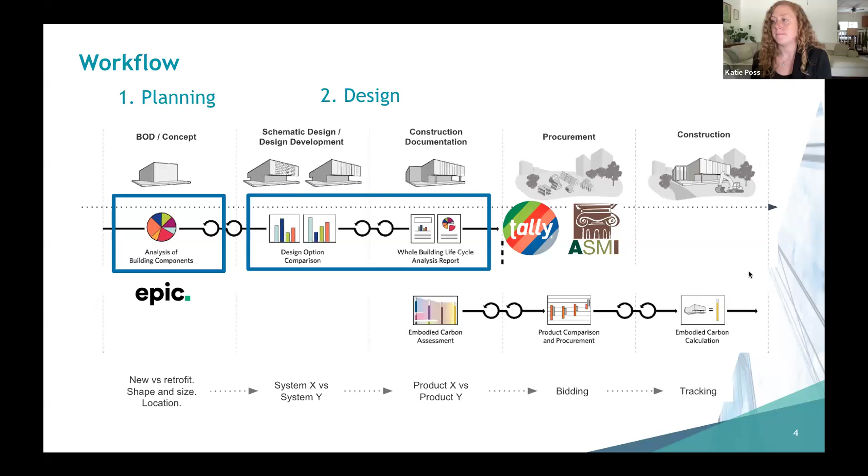And then when we advance through the drawings into procurement, at this point, the design is pretty much baked. We're not going to be able to make any significant changes to the design. But this is really where the construction partners, the GCs, the subcontractors, the material suppliers, they're starting to get awarded contracts and start to be onboarded to the project. They now have access to the drawings and the specifications.

And this is where EC3 can come into play, where you can look at the materials that are specified, look at materials that are locally available, especially in the case of ready-mix concrete and asphalt, understanding which material manufacturers have published EPDs in your area, and starting to look at some of the products that have been specified and determine which of them has a lower carbon footprint, and really using EC3 to inform procurement.

So as I mentioned, there is an entire ecosystem of tools, and there are more emerging every day. Tally, One Click, Athena, really those whole building LCA tools. There are tools that meet specific needs or pertinent to specific systems or materials. SE 2050's ECOM tool is really focused, as you could imagine, on structural design and structural elements. Bentley is really focused on infrastructure. Epic and CARE and Sustainable Minds, there is a whole slew of tools on the market, and they are used for different purposes and serve different functions.

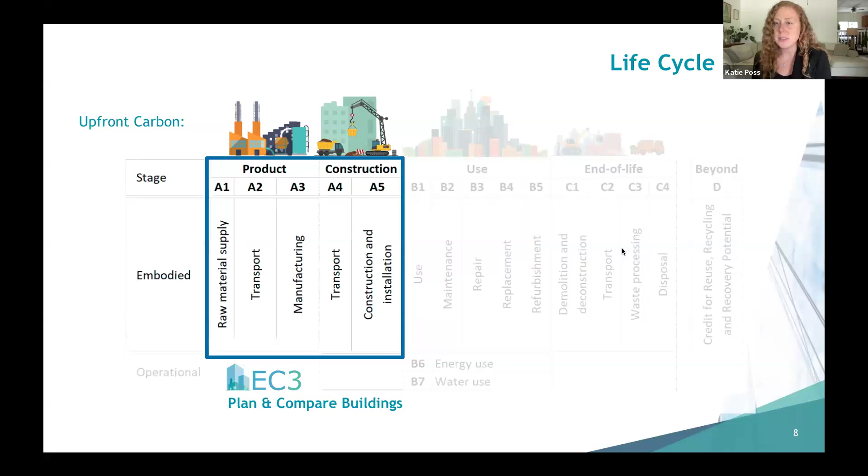We also have modules A4 and A5 in EC3. This can help contractors and project teams estimate the emissions associated with transporting materials from the point of manufacture to the job site. And then A5 would be associated with activities that are actually happening on site to build the building, excavation, temporary power, things like that. Right now, EC3 is limited to these life cycle stages, but just a glimpse into the future, we are working on adding some of the B and C stages, and eventually EC3 will be a whole life carbon tool.

When it comes to Tally, Athena, and Epic, being whole building LCA tools or whole life carbon tools, as I just said, they incorporate the use phases. So these are associated with activities like replacing materials over time. Think of a hotel and how often they renovate their rooms, replacing carpet, painting, replacing, patching drywall. Activities like that are associated with the use phase.

And then also looking at the end of life. What's happening to these materials when their useful life is over? Unfortunately, a lot of times buildings are demolished before the buildings have reached the end of their useful life. So the hope here is that we're able to reuse those materials to some extent, recycle, and as a last resort, dispose them into the landfill.

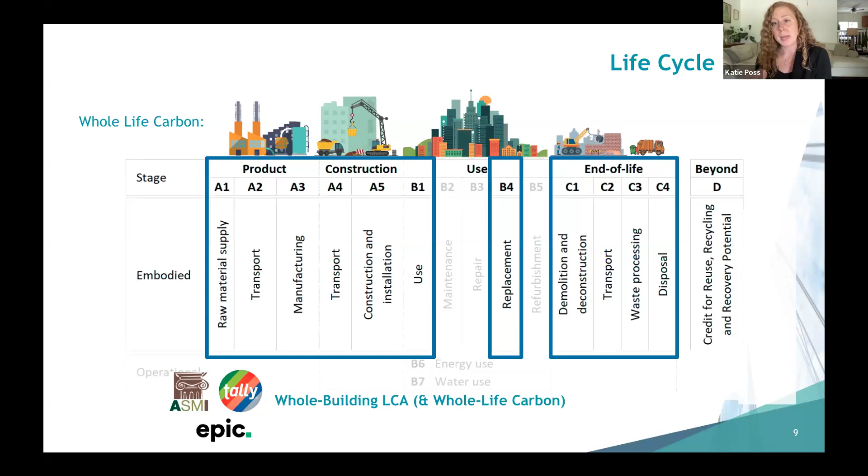So as you can imagine, we can calculate or estimate with a reasonable degree of certainty those A1 to A5 emissions, because they happen before we ever turn over a building to an owner. When it comes to the B and C stages, however, whole building LCA tools help us to estimate and predict what those emissions could be in the future based on certain scenarios. And Vaclav is going to get into that later.

So why do teams run an LCA? Well, there are a lot of drivers. Policy is a big one, both public and private policy. We're seeing a lot of activity in the policy landscape, not only here in the US, but globally. I just saw this morning that Ireland is prohibiting the use of CEM I cement, which would probably be most similar to our ordinary Portland cement or Type I/II cement, which has the highest amount of clinker, which is the primary driver of carbon emissions. So they are banning the use of that highest carbon cement altogether on state-funded projects.

Buy Clean is a term you might have heard here in the US. Buy Clean California, I believe, was the first. Buy Clean Colorado went into effect in January of this year, and Buy Clean, Buy Fair just passed in Washington State this year. And these Buy Clean bills typically are setting GWP limits or thresholds for specific material categories that project teams must meet for state-funded projects.

There are also various internal commitment programs or external commitment programs and benchmarking efforts. SE 2050, MEP 2040. The CLF is conducting their whole building LCA V2 benchmarking study now. And it's really useful for project teams to share their data publicly to the extent that they're able to support these benchmarking and aggregation efforts so we can better understand what the true impacts are of the built environment and drilling down into different building types, hotels, data centers, these are all different types of buildings and they'll likely have different benchmarks.

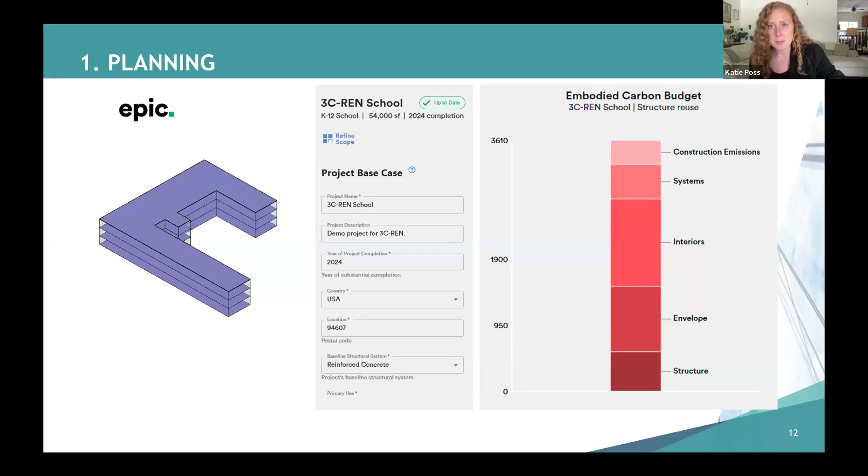And then finally, the full building analysis, which is what Vaclav is going to be demonstrating with EPIC and TallyLCA. With that, Vaclav, I don't know if you want to share your screen. I'll let you take it from here. Sounds good. Just give me a second to switch my screens here.

All right, so we'll walk through these tools as if we were going through the building design and construction process. So we'll start with the one that addresses the early design stages, the conceptual and planning stage. So this tool, epic.ehdd.com, that's the best tool that I know of that's openly accessible, that can help you with some of those early assessments before you actually have any sort of 3D models or material quantity takeoffs put together yourself. So this is a free tool that you can register for.

Once you open the tool, this is one of the landing pages. You can create a new project and walk through a couple of steps of just defining the basic parameters of that building project. So for example, we'll just go through an example test here, and we'll describe obviously the name, year of completion. Those are not necessarily critical for the calculations, but they help you put the building in context. Location, so I'm in Oakland, California.

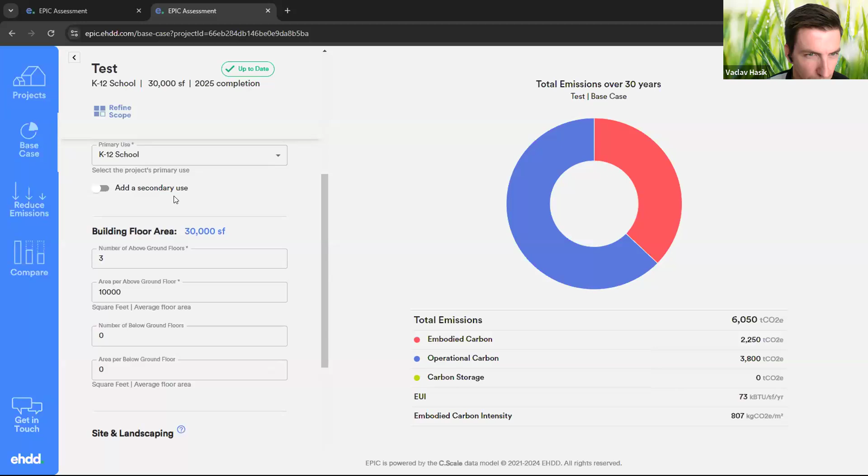Now, this is the initial way of understanding the potential carbon footprint of a project of this size, but there are also additional features that the tool allows you to do, and that's come up with not just the baseline scenario, but some other alternative scenarios. So I think at the beginning, it does ask us for the base case. We'll just keep on refining this one. We'll save the base case here. Not sure why it's not letting me. Okay. All right, so that base case has been saved.

Now we can go and define additional cases. So we'll go into reduce emissions. We can create a new scenario. We can copy the current scenario and then start modifying various aspects of the building design. So here we have test scenario 1 copy. Say this is scenario 2. And then we can start modifying, let's say, are we reusing part of the structure? We can actually specify the percentage of that structure that was reused. We can do the same thing for roofing and other systems on the building.

And over time, you will see that the results on the right side actually start changing, and they show you some of the potential differences in the embodied carbon and operational footprints that some of these decisions might make. So let's say we were reusing all of the structure, put that structure reuse at 100%, wait for the project to update.

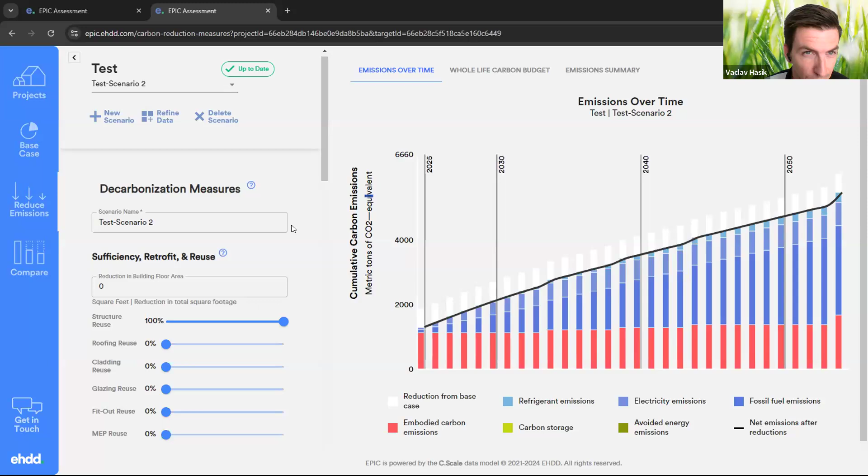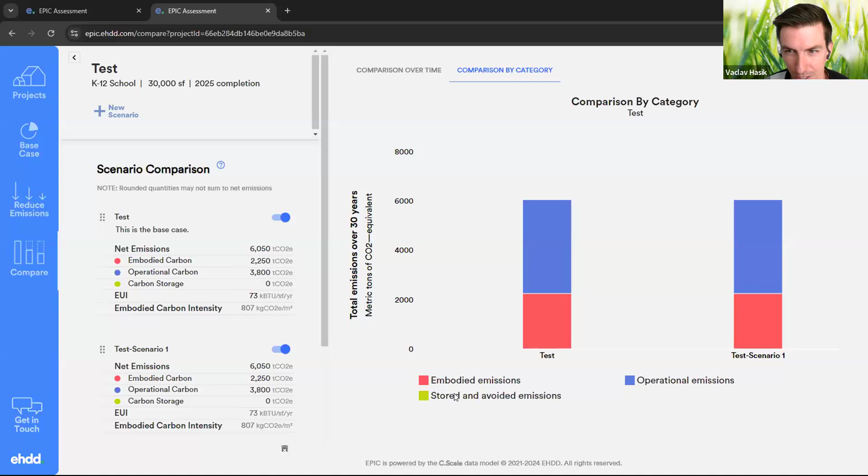So we'll save this scenario. Actually, it auto saves. We can go into the compare section. And now we can show the baseline scenario and the other test scenario side by side. You can see again embodied and operational emissions, as well as potentially stored carbon emissions if those were relevant. So you can see again different ways of showing those differences in results.

In this case, the operational impacts actually overpower any of the embodied carbon impacts. So you don't see a whole lot of changes here, but this is a nice tool that again, you can use very early in design to just kind of evaluate basic understanding of different types of projects, structural systems, reuse aspects, etc. You don't have to have detailed material quantities.

So that covers planning and conceptual design. Now, if you are later in design stages and you actually start putting together, let's say, a building information model, that's where you would typically go in a little bit more detail.

Hey Vaclav, we'll open up. Yep. Other questions? Maybe two quick questions on Epic. How are Epic's estimates validated?

Good question. So they are based on actual material quantities collected on projects, and they combine those material quantities with carbon footprint data from sources including EC3 and some other generic data sets. In terms of how the impacts are actually validated, I don't know. This is not a tool that we develop. So I assume there should be some discussion of this in the Epic documentation.

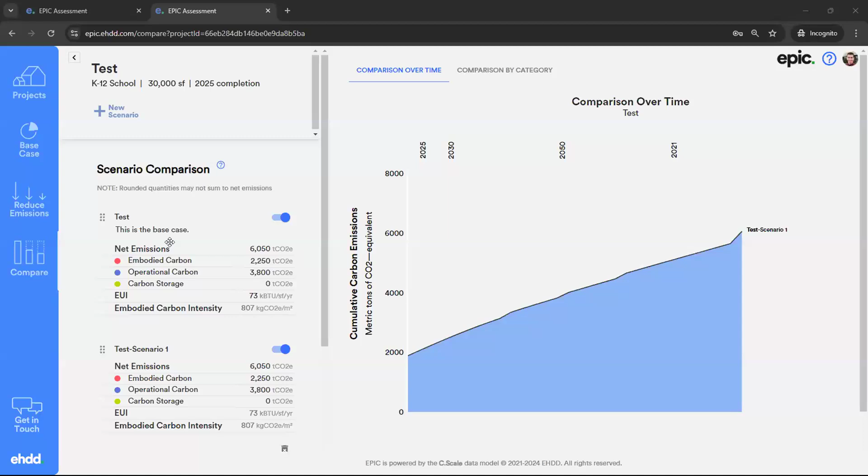I think, is the question about the reductions? I think that's the question, right? So if you have reduced emissions, in our case where we, for example, defined that the structure was reused, the avoided emissions are essentially removing the amount of carbon that it would normally take to manufacture or to make some of those materials that were reused from scratch. There's some additional options that you have here in how the reductions are calculated.

It's always taking into account the differences in the production emissions, or even use phase replacements emissions between the different scenarios that you set up. Does that answer the question, or was the question about something else? I think so. I'm not sure. Maybe we can save that one for the end and let Martha elaborate.

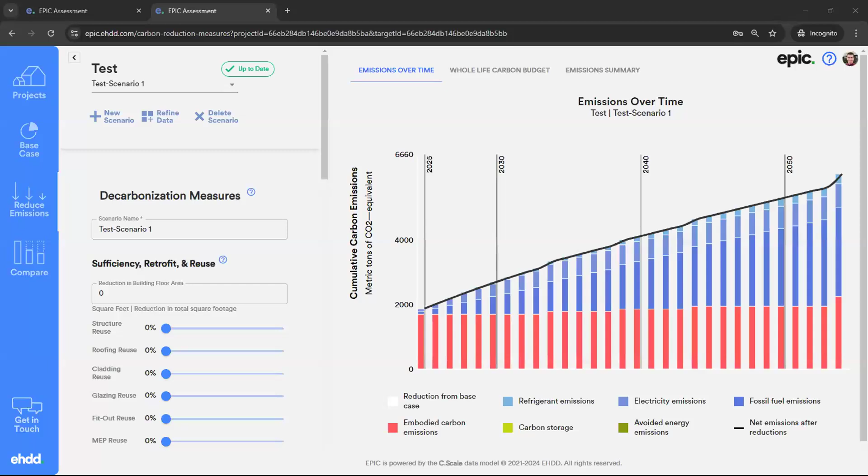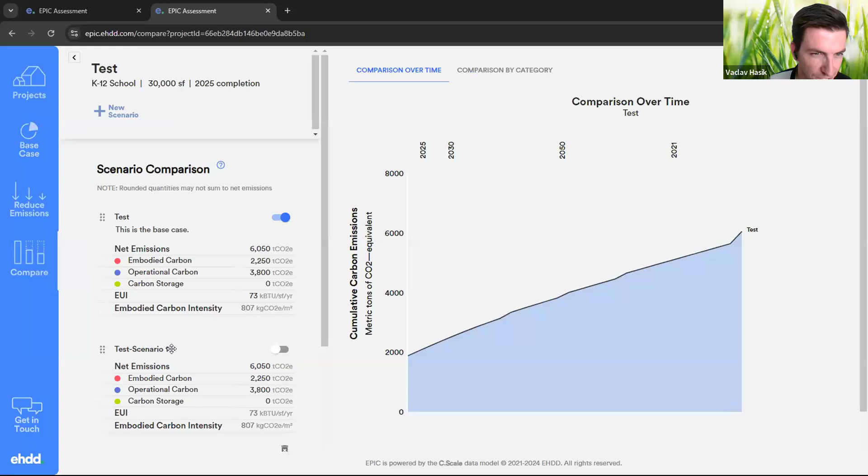Sounds good. And I see there was a question about what happened to test scenario number 2. Good question. I thought when I renamed it, it actually changed the name, but it didn't seem to help. Oh, here it is. Okay, sorry. It's been a while since I used the tool. So now, when I defined test scenario number 2, it actually was shown here.

That's why we weren't seeing some of the results or reductions in impacts, because test scenario number 1 was the exact same copy of the initial baseline. So apologies for some of the confusion here. I hope this makes a little bit more sense now that we see test scenario number 2. Avoided emissions mean different things to different groups. Yeah, but hopefully in this context, that explanation helps.

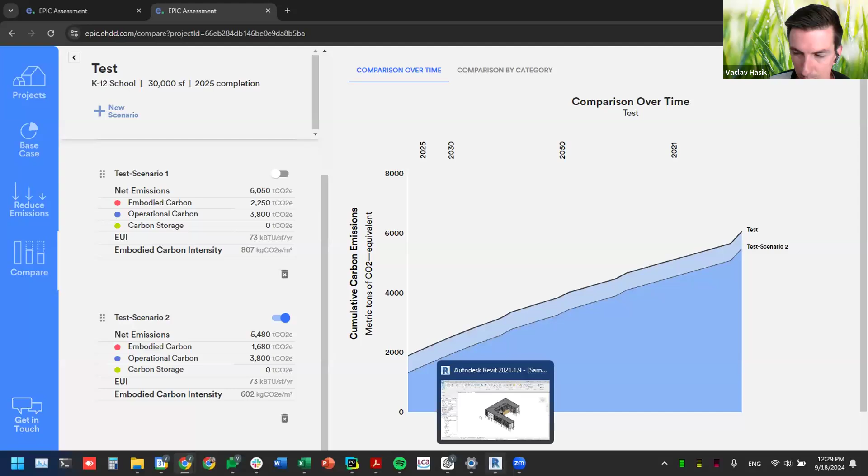All right, let's move on to the next step, and that would be... One more question. Is there a tool that could be used in other countries other than the US and Canada? Currently, I think there's at least one tool. It's not open access, I don't think, as the Epic tool is. Epic tool really focuses on the US-based market. That's where the material quantities are related to.

There's OneClick, I think it's called the Carbon Designer tool, which does something very similar. And that one actually includes data from Europe primarily. I don't know if they actually have North American data. They might, but that one would be more globally applicable. So you could do something similar with OneClick Carbon Designer.

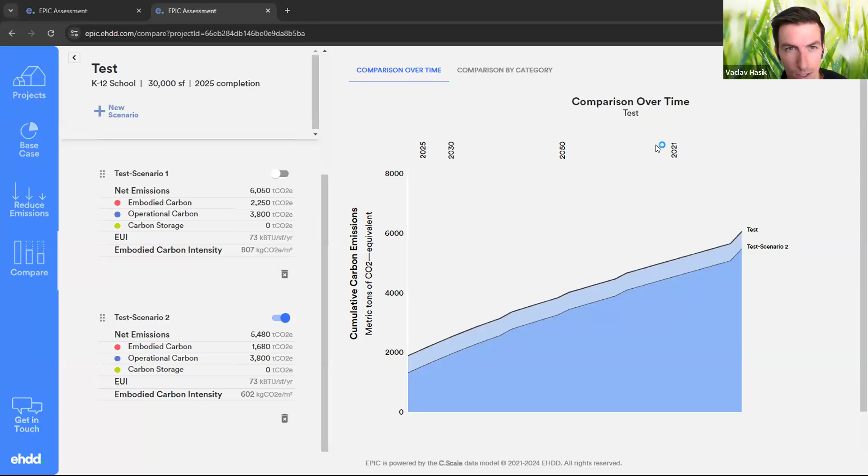All right, if there are no more questions on the early stages, let's move on to the next stage. So let's say we are in schematic design development, where we're actually starting to put together some sort of building information model. And we'll talk about building information models specifically here, because our TallyLCA tool is a Revit plugin.

There's also a way to do this kind of analysis without having a Revit model. Katie will go through the EC3 tool later on, which doesn't require you to have a Revit model. You can simply input material quantities. An EC3 tool can also be useful during early design stages. It's not just a procurement tool. So I'll leave Katie to also explain some of those ways that you can use EC3 during different stages of design.

Now, if you're an architect specifically and you are using Revit, I think TallyLCA should be pretty helpful to you. It really streamlines the process of assigning material information as well as the environmental impact information to your building information model.

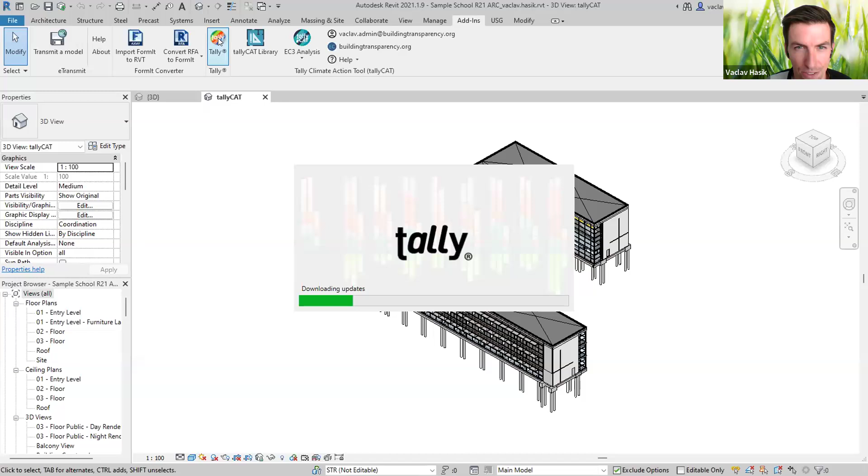But once you install the tool, it will show up here under the add-ins section. And this colorful TallyLCA logo, that's how you launch the tool. And the tool first downloads all of the material information in its library, as well as all of the environmental impact information that you can then select from.

At this point, we can select the type of study that you would like to run. I will walk mainly through the full building study, but you can also define different design options in your Revit interface and do direct comparisons of the impacts of different options. They can be as simple as material substitutions, but you can also set up entire assemblies that you can then compare to each other. And then you can also use TallyLCA with the defined template file.

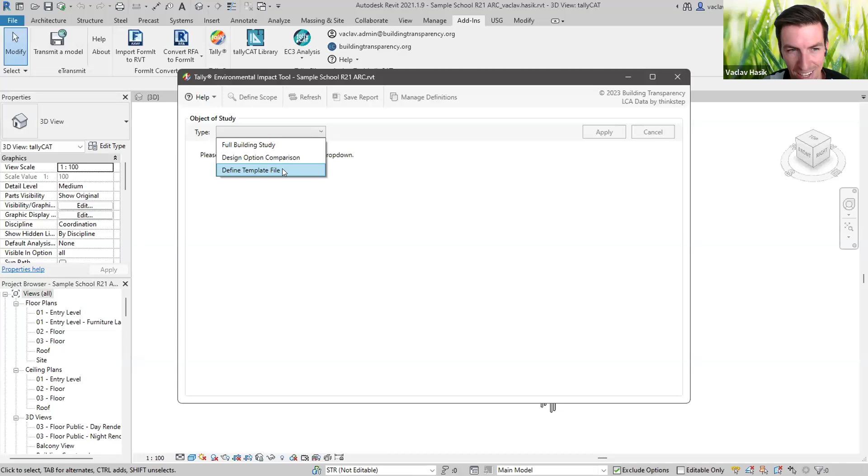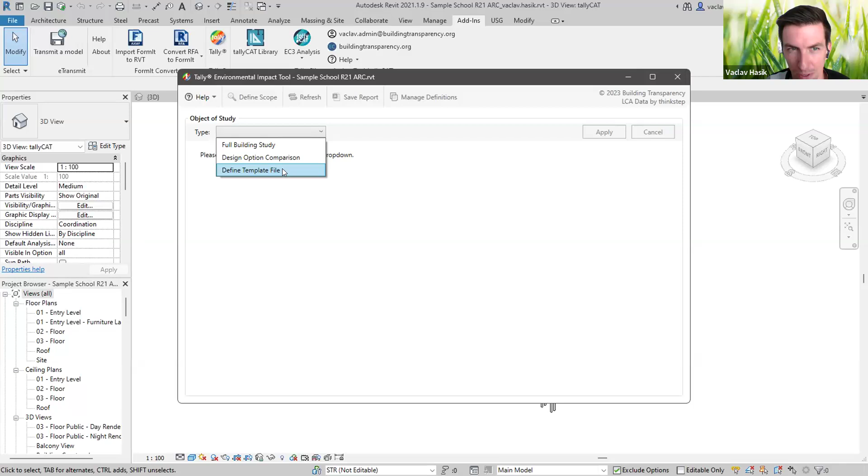If you don't actually want to assign materials just to physically placed elements throughout the model, you can go and assign materials to your template, where you assign materials to all of the families that you may be using as part of your firm's standardized set of families. And then anyone that uses your predefined template subsequent to that wouldn't actually have to go and define the material types themselves. They would simply start placing things in space and immediately be able to assess the carbon footprint or life cycle assessment impacts of that project.

So to show you how the tool works, we'll go into the full building study section. And the first step, again, to Katie's earlier point, is to define the scope of the analysis. Here you can see all of the Revit categories that the tool can handle right now. It's really focused on the structural and envelope systems, as well as some of the major interior components. It does not cover things like MEP systems.

You can also include or exclude elements based on the work sets that they are placed on. This is especially helpful if, for example, you have interiors that are actually part of the envelope or within the building. For example, for LEED purposes, you can choose to include or exclude some of the interior components that are not immediately connected to the envelope system. And so there may be a way of differentiating which elements are included or excluded just based on which work set they might be placed on.

You can also include or exclude elements based on which phases they were created in. So if you're working on an adaptive reuse project, or you have a project with multiple phases, you can also include and exclude elements based on that selection. And then TallyLCA also allows you to assess impacts of linked models. So in this case, I have a structural model, which is a separate model, just linked into the currently opened one. And you can assess the impacts of those linked models as well.

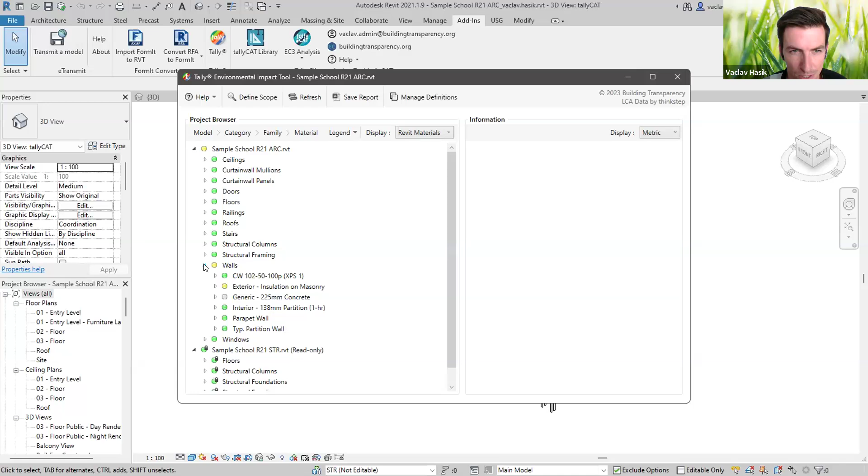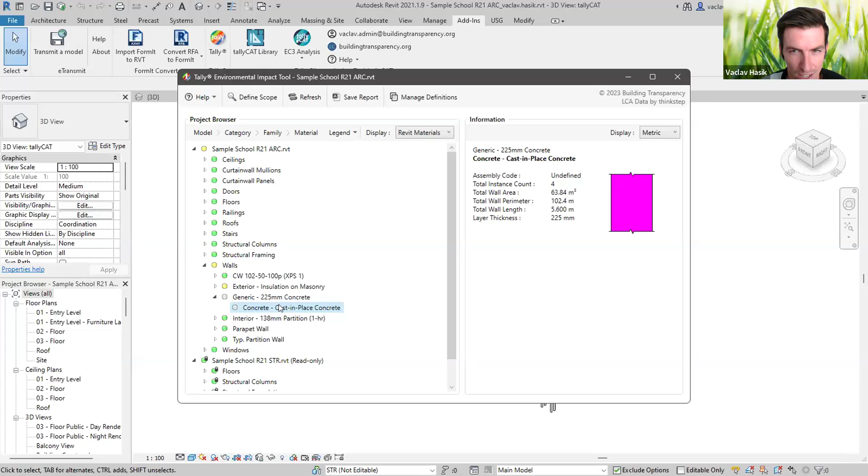Now let's take a look at a couple of examples of how you actually go and define some of the material information, or how you assign environmental impact information to the individual elements. We'll take a look at some of these walls that have not been defined yet. For example, we have this generic concrete family. So I'll open that one up. And that family only has one layer, and that's the cast in place concrete layer. If I wanted to see where this object is in place, I can right click it and select elements.

And then if I move this over, you can see highlighted where those elements actually are within the model. You can also isolate in the Revit view to be able to better tell where some of those elements are located. On the right side here, you can see the material quantity takeoffs that Tally was able to get from Revit. So we have the total wall area, wall perimeter, and the wall length. And those would be some of the dimensional information that is then used to calculate the actual material quantity at the end of the day.

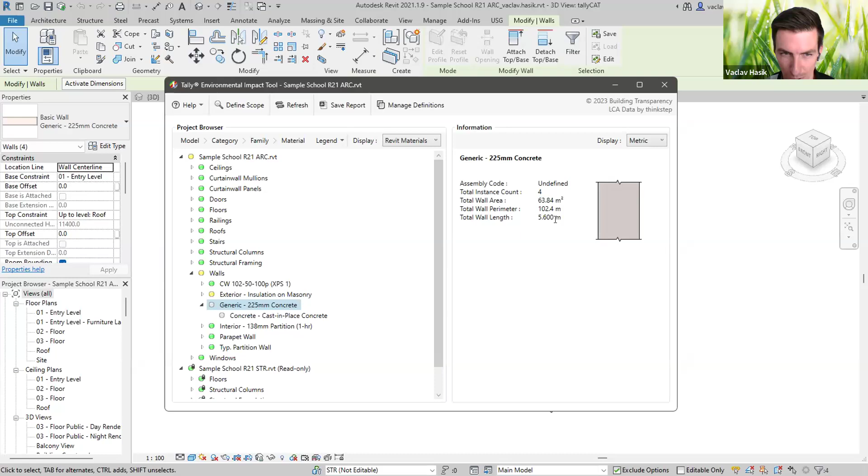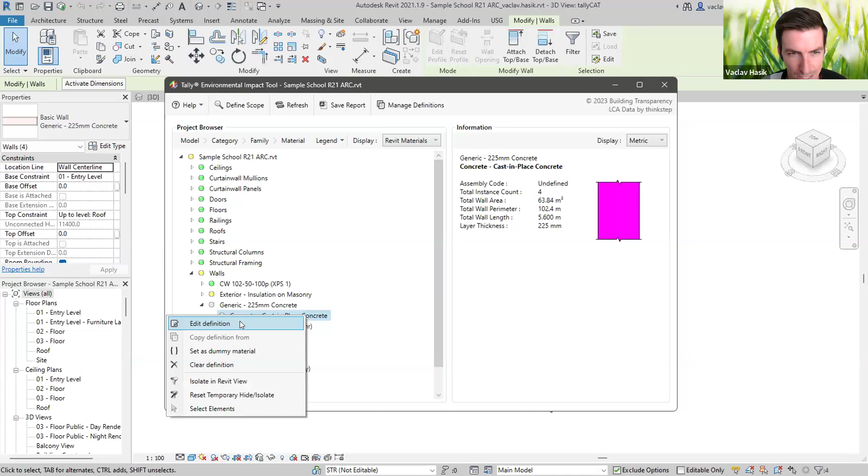Okay, now if we click on this layer, we see that this area here is blank. That essentially means that we haven't actually assigned any material impact information to that element in the TallyLCA tool. So what we have to do is right-click that element, click on Edit Definition, and then find the material type in the Tally library. So in our case, this was a cast-in-place concrete, so we'll go into Concrete Division, Cast in Place, and there are a number of predefined types of concrete that you can choose from. This was a wall system, so I will assume that it was probably maybe 4,000 PSI strength. And I can click on the Apply button, or I could right-click and click Apply here.

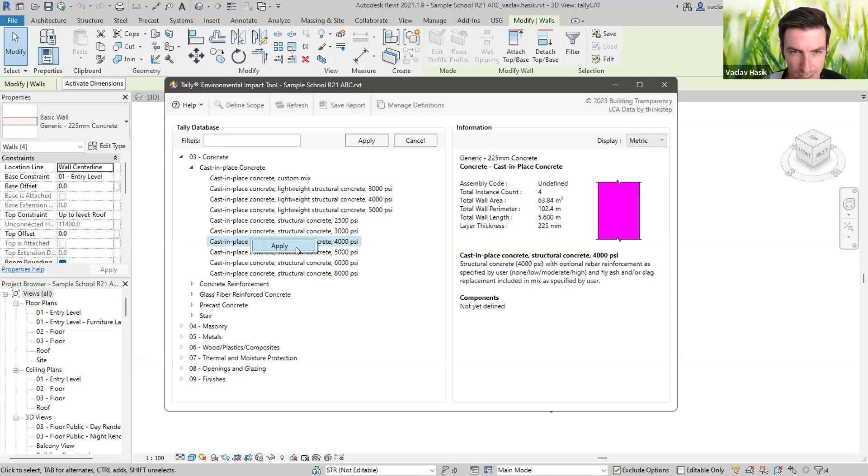The next step that you need to do in TallyLCA is provide some additional information about either the source of that material or some additional performance characteristics or description of the material type. So in the concrete case, you have options of different amounts of supplementary cementitious materials that you can choose from. We also have the NRMCA regional benchmark values that you can choose from here. So if you're just coming up with, let's say, a benchmark building design with all the benchmark values, you might be able to select one that is applicable to your particular region.

Normally, if you don't really know which one to select, the first one is the most generic data source selection that you can choose from. So in our case, I'll do that. I'll say this is a 0% supplementary cementitious type of mix. You'll see that automatically a couple of the other fields are getting auto-populated with information. That's additional information that is necessary for the tool to be able to do an actual realistic material quantity takeoff.

For the concrete material, it's actually pretty straightforward. You just take the full volume of that element and you connect it to the concrete material data within the tool. There's no sort of nuanced additional types of information that you might need to specify. There is an additional accessory material that you can add to this element, though, that may not actually be modeled within the building information model. And so Tally will always tell you about the potential accessory materials that might be relevant based on the fact that you've selected a certain type of product, like cast-in-place concrete. So in this case, there's probably some reinforcement needed within the cast-in-place concrete wall. We'll select the first most generic data set for the reinforcing rod.

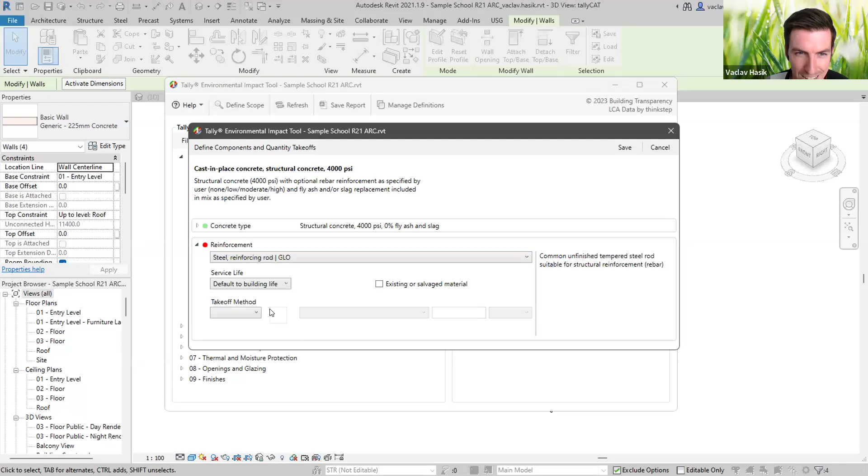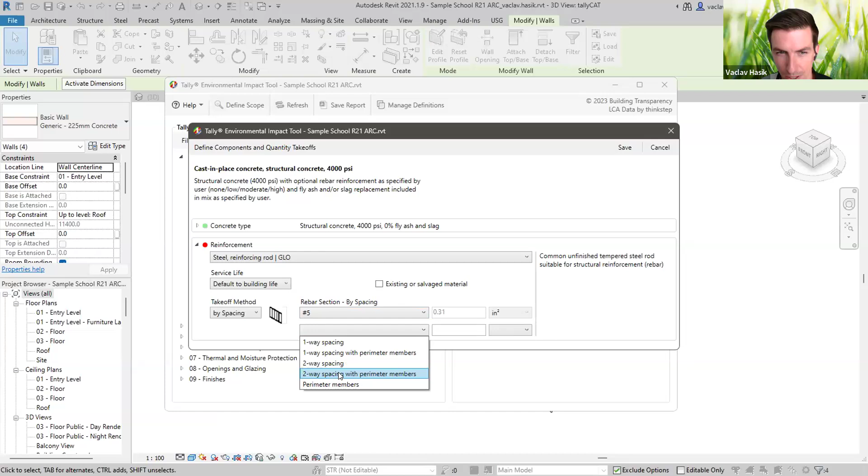And then here, the takeoff method will actually be slightly more complicated. You can either use a predefined typical amount of rebar that there may be per unit of concrete element, or you can also define the takeoff method by spacing, and you can say exactly what size of rebar you have. And then do you have one-way or two-way spacing? Do you have perimeter member rebar as well? And then you would define what type of spacing there is. So let's say it's 10 inches between different rebar sections. You can specify that here as well. This information will then be combined with the wall area that is put in place, and it will calculate an actual realistic quantity for the amount of rebar that there may be in that wall section.

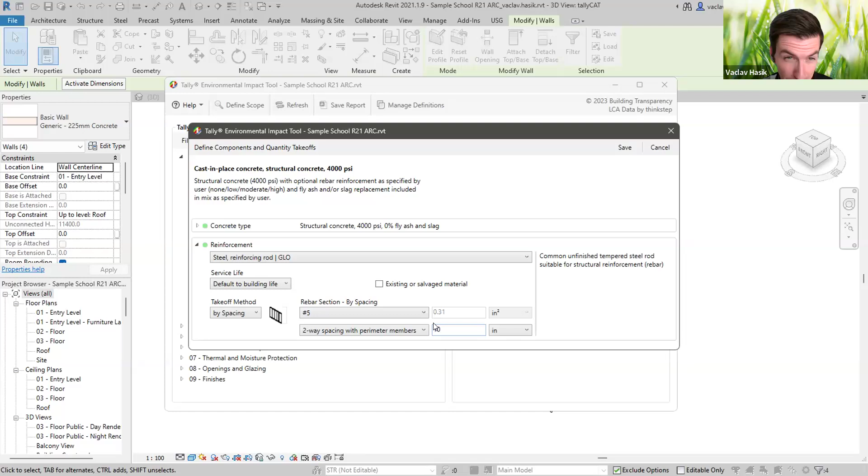So at this point, we could go and save those definitions, and you will see that now the area here in the bottom right corner is populated with the general product type that we selected, and then the individual subcomponents of that product type. So we have structural concrete, 0% fly ash, and we have the steel reinforcing rod. There's 950 kilograms of that steel reinforcing rod that we selected.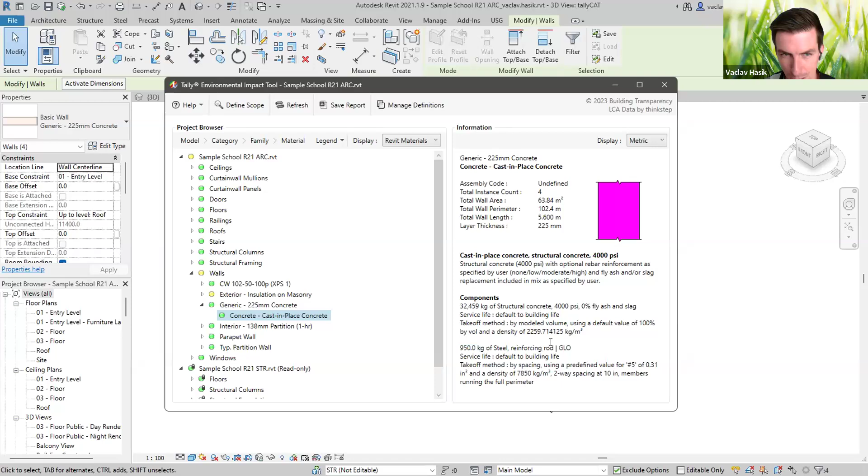So this is how you assign material information to each element. It is essentially the same process for the rest of the project, but obviously different material types may have different drop-down menus for some of the takeoff methods. Once you fill in all of the material information throughout your project, you can go and save a report.

And here you do need to fill out all of the fields. So I will just type in here, test, goal and scope assessment. It's definitely critical for you to at least review the gross building area field and make sure that it accurately describes your project, because when you're generating the report, it will show you some of the environmental impacts per unit area of a building. And that is a good way of gauging, first, the validity of any of the results that you get, but it also allows you to then compare to other types of projects if you're trying to do a portfolio benchmarking study.

The expected building life will most likely remain at 60 years. That's the typical building lifetime that's used in these life cycle assessments. But you can modify this expected building life if you wanted to change it to something like 75 or 100 years. It will affect the replacement impacts of some of the materials that may not last the entire lifetime of that building, specifically some of the interior components.

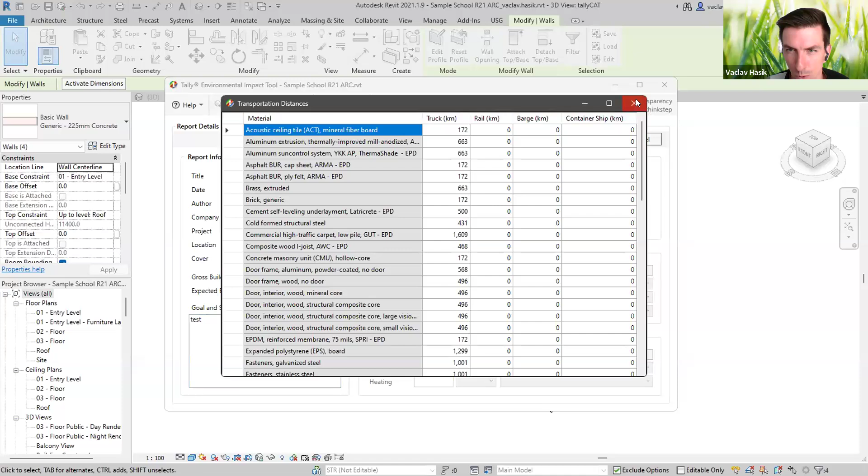There are some additional settings that you can modify. You can look at the transportation distances that the tool is using by default to assess the transportation-related impacts in the A4 stage. You can also include or exclude biogenic carbon, but normally you would probably just include it. It just gives you the option to potentially focus on fossil carbon in cases where that might be the requirement of the analysis. But by default, you will probably be including fossil and biogenic carbon.

You can also include construction impacts and operational energy impacts, but this is not a tool to help you come up with those quantities of fuels or water or other resources. So you would essentially need to know what those quantities are and simply input those quantities here, select the unit, and select the source type of either the construction fuel that's being used or the fuel that's being used in the operational energy impact space. So for example, if you did your energy model in another tool, you could enter the final quantity into TallyLCA here.

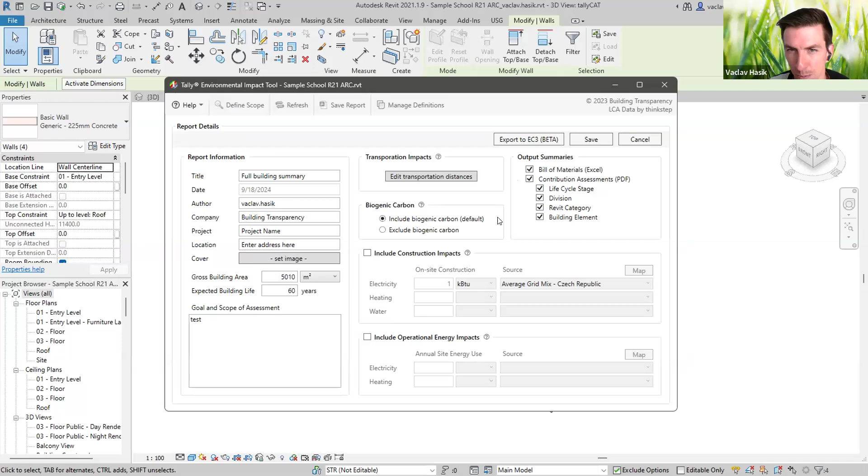TallyLCA is primarily useful to help you understand the embodied impacts in the materials that you put in place, though. So that's what we'll focus on here. Once you have all of this filled out, you can click on the Save button, and that will save out a PDF report as well as an Excel report. The Excel report itself might usually take about a minute to generate, so I'm just going to show you an example that I already saved out before.

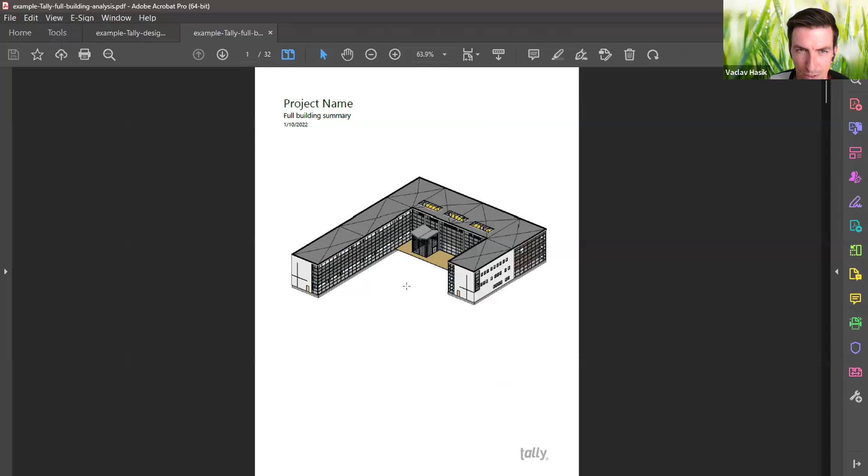So we'll start with looking at the PDF report. This is what the report will look like. You can include an image on the front page of the report. Then you have a table of contents on the next page. And finally, page 3 will have your first set of results that you can go and analyze. I talked about showing environmental impacts per area, which is the most useful when you're trying to understand if your modeling process was correct and also how this might stack up to other buildings.

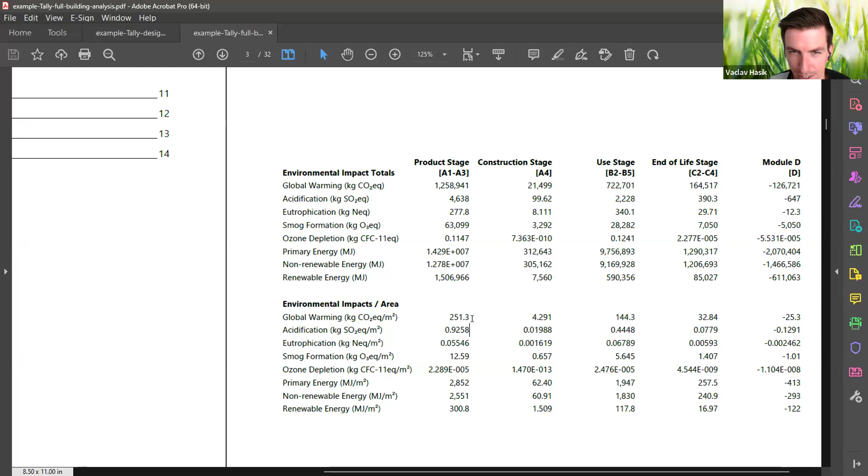So it's usually a good idea to start by looking at the production stage global warming potential value per meter squared or per area. This value should typically be somewhere between 200 and 1,000 kilograms of CO2 equivalent on a new construction project. This is probably also the value that you can compare to what you may get for embodied carbon footprint in the EPIC tool that we looked at earlier, and see how this value actually compares. When we go through the rest of the pages, you can start analyzing more granularly where some of the contributions to your building project footprint are coming from.

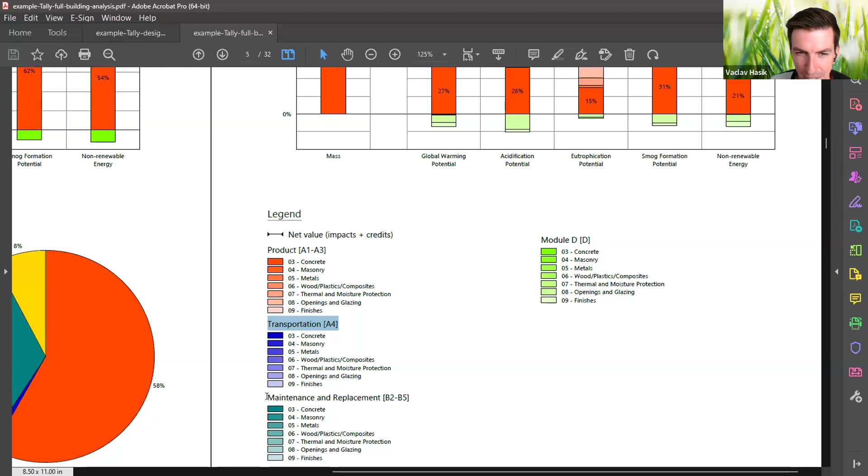So for example, here on the right side, we can look at the various environmental impact categories that Katie mentioned and quickly see what the contributions are from, in this case, different life cycle stages. So any of the red stages here are production stages, A1 to A3. Blue is transportation stages, so that's actually very minimal. It's hard to see here. Maintenance and replacement stages are in these turquoise colors here.

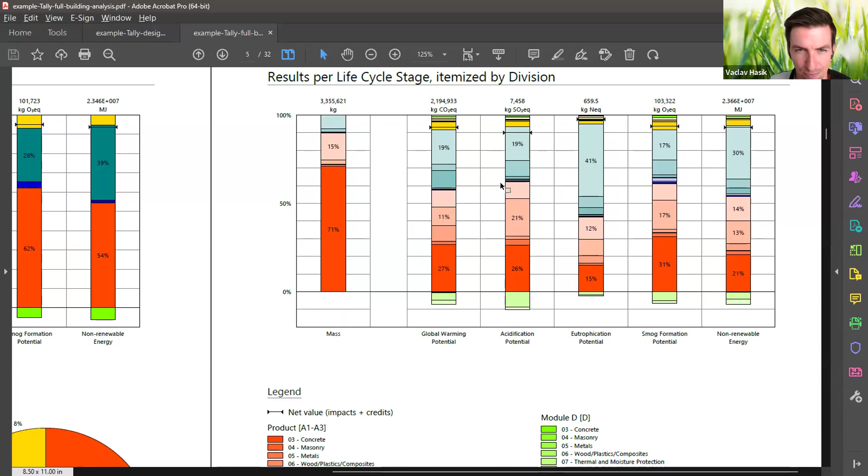And you can start taking a closer look at, okay, what are my biggest contributors? Where could I focus my attention to? If we keep going through this report, you can see additional outlines of which types of materials contribute how much to each of the individual environmental impact categories. It may be kind of hard to sometimes actually connect the different shades of colors to the different bars. And so it might actually be more helpful to go and open up that Excel report for this particular project.

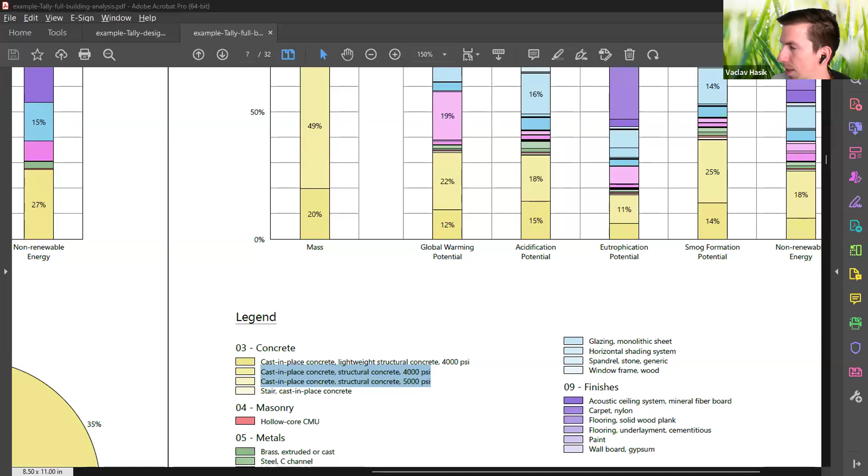So move that over here. This report has exactly the same data as is on the PDF report, but it actually allows you to see the specific values. And you can then also extract it and modify it and create your own charts if you would like to. The structure of the report is exactly the same. So normally you would go and see what are the types of information that the bar chart in the PDF report would be showing you.

And for example, if it's showing you the different divisions of materials and the different Tally material entries that you've selected, you would go to the division Tally entry tab. And here you can see that I can now actually see the global warming potential results for the different types of cast in place concrete that were used on the project. And so again, this is another way of going and understanding the contributions of different elements of your building to the overall project footprint.

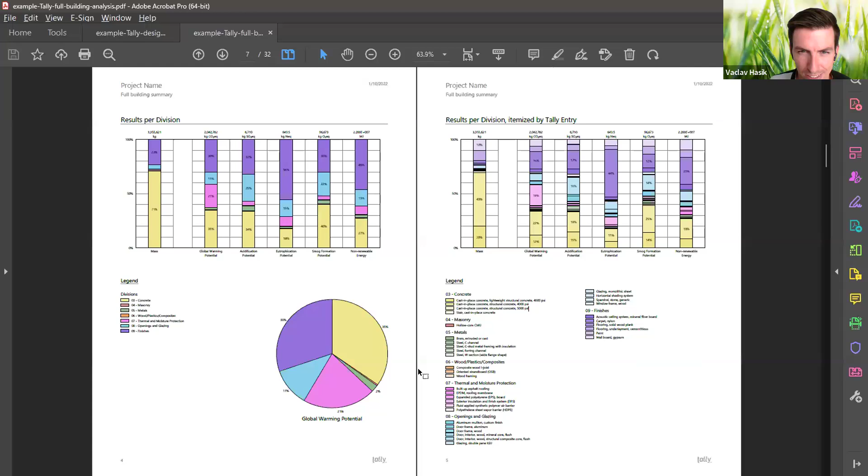I think I will show maybe one more thing in the project report, and that's the back section of it. So there is the calculation methodology in the middle of the report that walks you through the methodology that the tool itself uses. It also includes descriptions of the various life cycle stages and environmental impact categories if you are relatively new to this topic. So you can always go back and reference it for your own understanding.

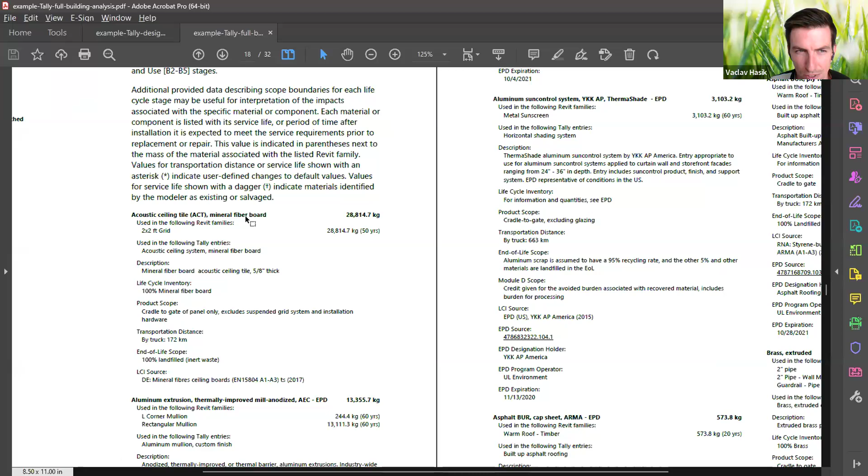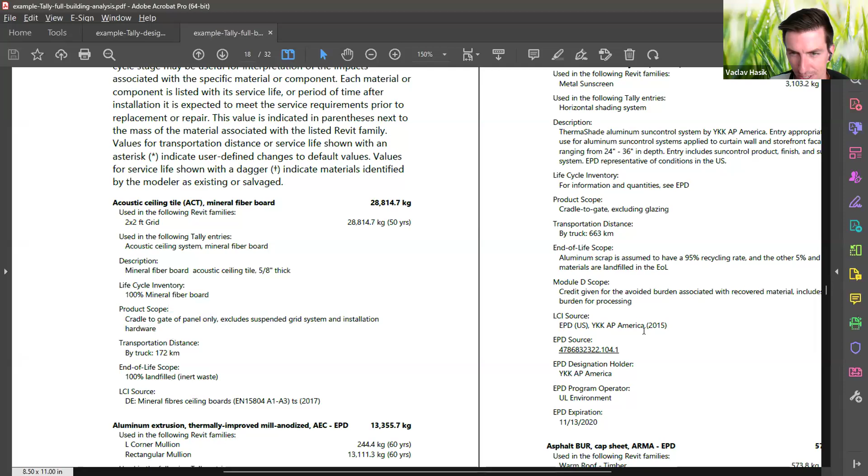In the LCI data section, this is where you get a list of all of the material types that you have actually selected on your project. And you can see which families they're used in, what are the mass takeoffs that TallyLCA has assessed based on the different definitions that you've defined within your building information model. And then it also has additional descriptions and some of the background methodological aspects that you can also take a look at. So this last section of the report is also another good section for quality assurance of all of your work.

I think I'll take a step back inside of TallyLCA and show you one last thing before handing it over to Katie to talk about EC3, or actually to open it up to questions before I hand it over to Katie. So far we've assessed an entire project as a whole and just looked at one set of results and tried to understand the contributions of different components or material types. Now you're going to be making decisions on what material types to use, or if there are actual systematic design alternatives that you can implement.

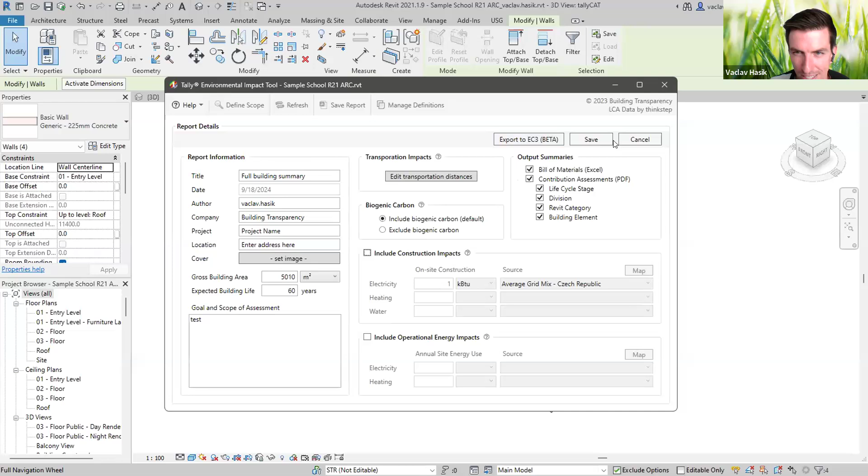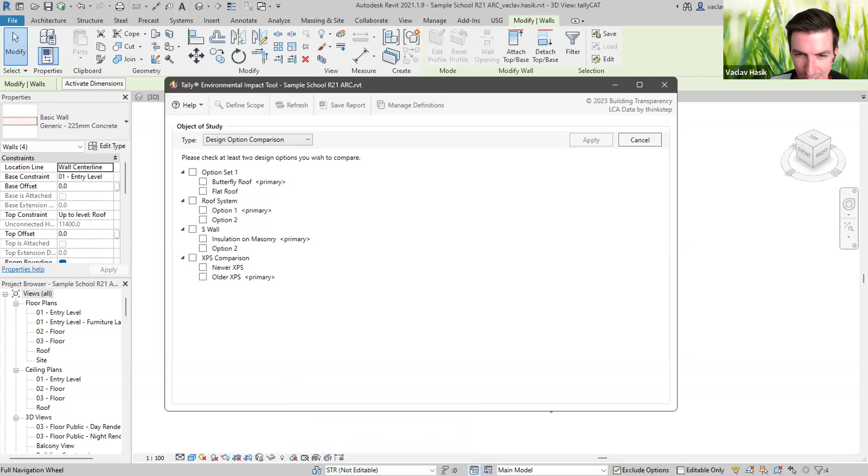So I'll go back into the define scope section and go into the design option comparison section. And in my case, I've actually defined a couple of different design option sets down here using the native Revit design option features. So if you're familiar with this feature, you can define different design options inside of Revit. You can then actually model those design options. So I'll show you an example of my design option for these different atriums.

So this whole atrium, I have two design options, one with the butterfly roof and one with a flat roof. And you can also tell that the curtain wall system has a slightly different setup in terms of the size of the individual windows and the layout, the mullions. So in this case, I can go back into TallyLCA and we'll do an option set comparison here for the butterfly roof and flat roof.

Click apply. Now it's collecting, again, dimensional information for those two design options. And in my case, I've already gone through all of the materials and assigned all of the material types from the Tally library to my Revit model. At this point, I can go back to save report and save out another report.

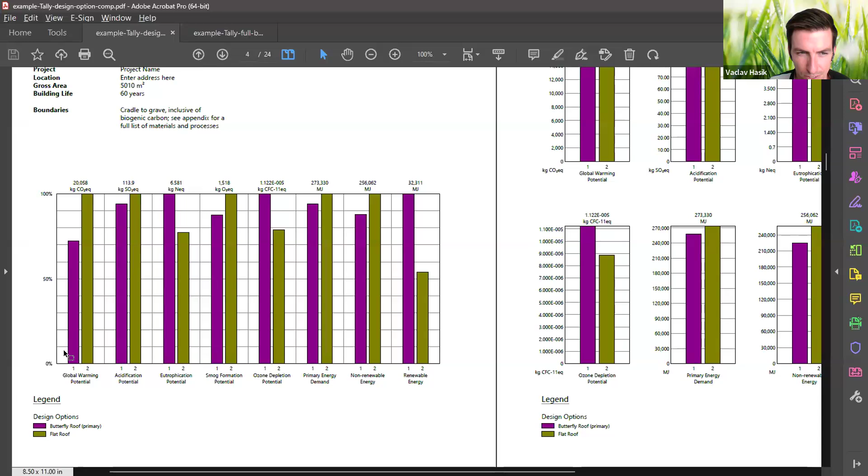And that report will look like this. So it starts off looking the same, except now when you get to page 3, you will actually see two sets of results for each environmental impact category. And so in my case, I see butterfly roof system, flat roof system, and you can see how they stack up side by side in each of these environmental impact categories.

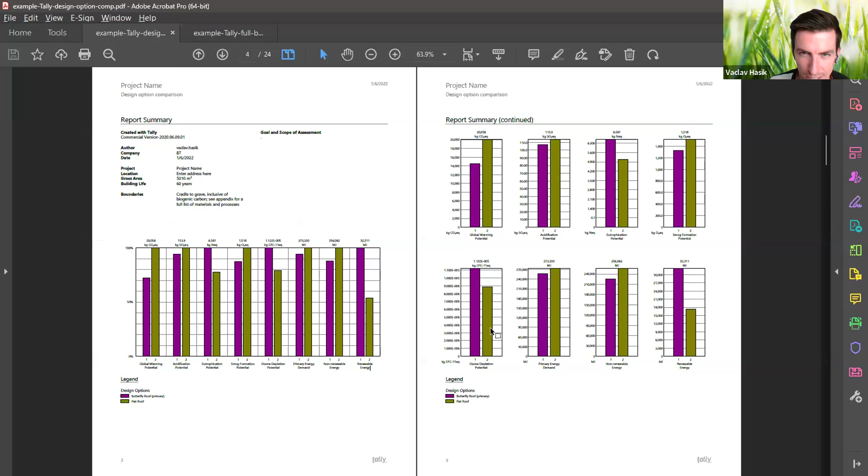I can likewise go and take a look at some of the additional analyses. So let's say we are looking at divisions by Tally entry again. I can zoom in and see the contribution of different material types to each of those design options. And I can start better understanding how that change in the whole atrium system may actually affect the overall impacts of that particular part of the building.

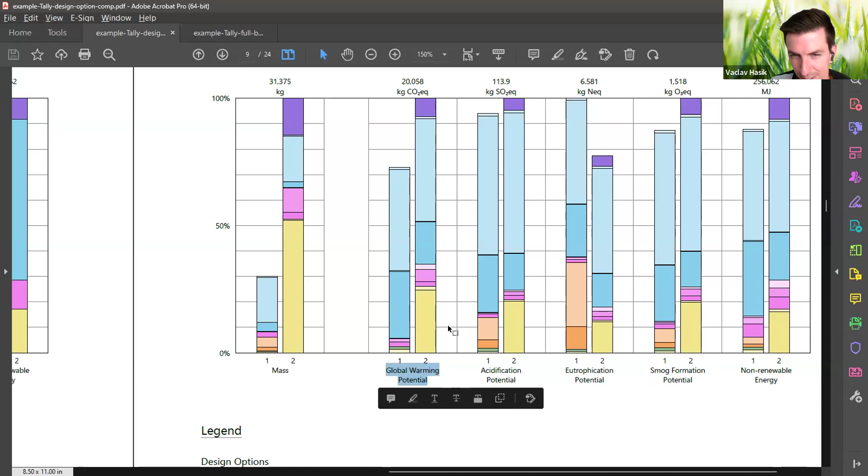So when you're doing these comparisons, it's always critical to make sure that you are comparing things that are functionally equivalent. So for example, in my atrium case, I assume that the energy performance of the entire building wouldn't actually change by doing those differences in designs of the atrium. And also that the amount of floor space covered by that atrium is exactly the same as well, so that you can have the same functionality happening within that space. Those are some of the things that you always want to consider when you are doing these design options comparisons, that the functional equivalency is preserved.

With that, I'll open it up to questions from the audience before moving on to the next section, EC3. So we've got one about the ability to add product-specific EPDs into Tally. And then how does Tally calculate materials if you select existing or salvaged options?

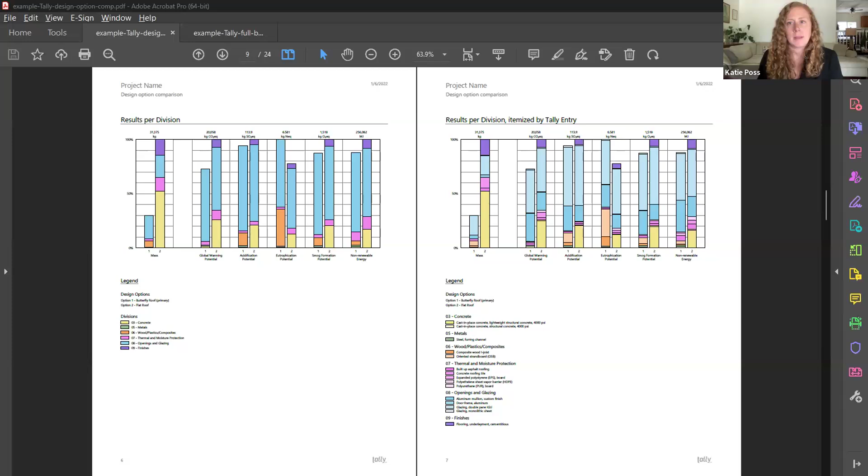So the first answer is you can't add additional EPDs. Like if, let's say, you found one on the internet, you wouldn't actually be able to add it into TallyLCA natively. We are working on a next generation of this tool where we will actually pull more environmental product declaration data from the EC3 database. It's not currently available in this version of TallyLCA.

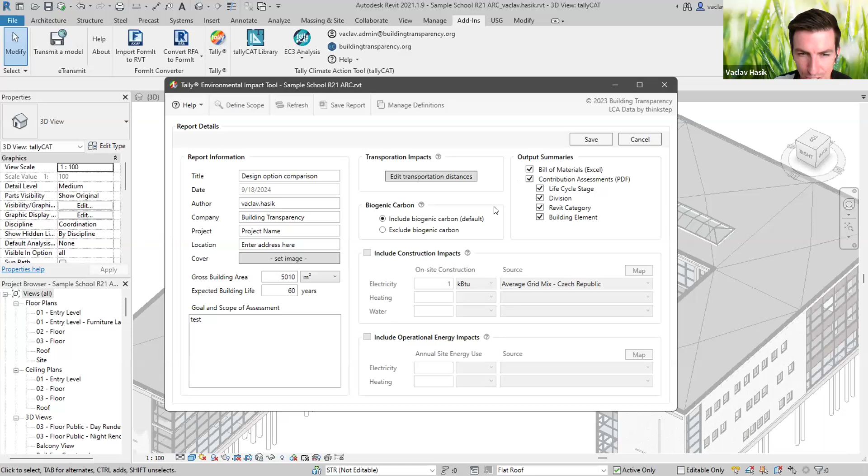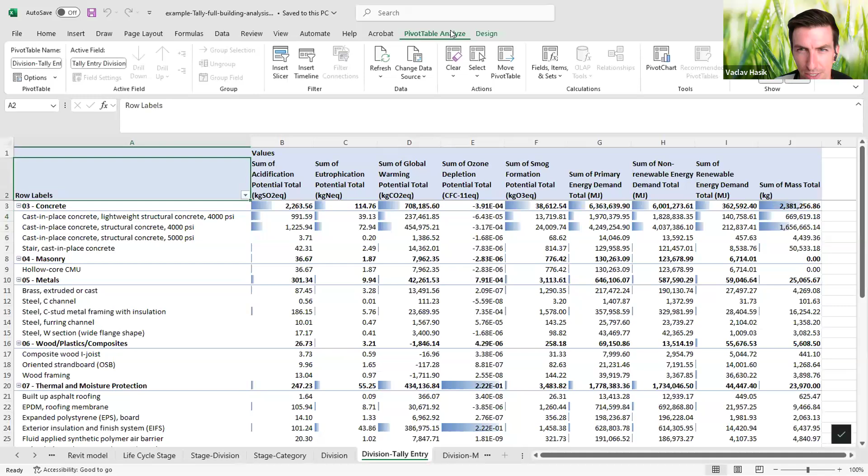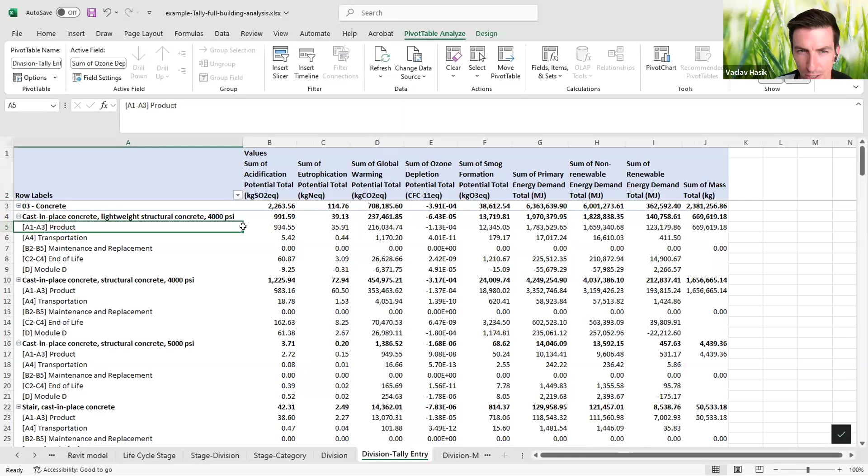So normally what you could do is first, you could select a generic equivalent to that particular material type. You could generate the results here in the Excel-based set of results, and you could actually reveal additional information in this table. So this is a pivot table. So I could go and click on PivotTable Analyze, open the fields list, and then reveal the life cycle stages. And in this case, I could substitute the A1 to A3 product information with the information on the EPD. Now, this is obviously a little bit more cumbersome. At this point, you would have to do that yourself. The tool doesn't do it itself today.

There is one potential option for you if you are okay with just focusing on embodied carbon, just on the global warming potential side of things. There is a way of exporting your TallyLCA model into EC3, and then you could select a product-specific EPD inside of EC3. So essentially, you transfer all of the material quantities from your TallyLCA model, as well as the initial description of what the material is, and then you can refine that material assignment with the specific EPD information once you get to the EC3 tool. So that would be another approach.

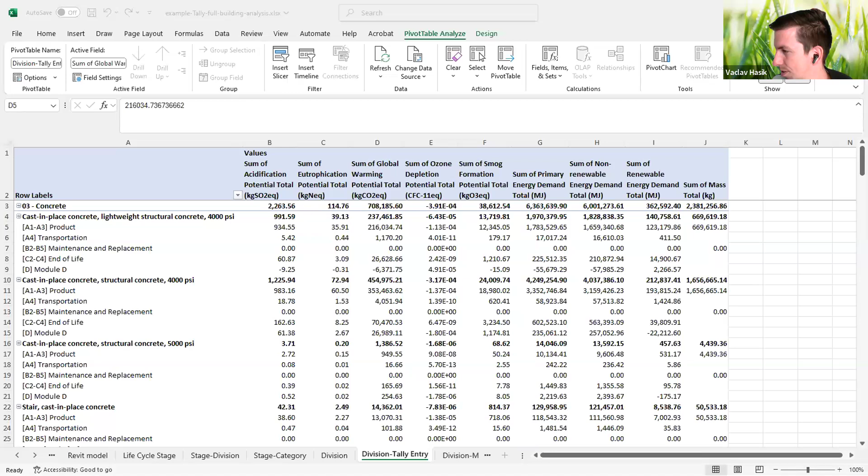So that was the first question. Second question was, remind me, was that the reuse of materials? Yep. How does Tally calculate materials if you select existing or salvaged options? Right. So if you go and define or edit definition, so you have this aluminum mullion, there is this checkbox for existing or salvaged material.

If you check that box, the tool will essentially remove the A1 to A3 product impacts from the calculation. Because it's assumed that if you are using a salvaged material, those production impacts have already been accounted for in the previous life cycle or previous use of that particular element. It will still include the transportation impacts, the maintenance and replacement, and end-of-life impacts for that material, but it will remove the production-related impacts.

Great. We've got another one. I can take a stab at this. Are there any tools that cover MEP items? You mentioned Tally doesn't. I'll show you here in a moment. There is some EPD data for MEP, and we have some categories built out in EC3. Vaclav, I guess Tally doesn't have any MEP data. Are we looking at that in V2 possibly?

Yes, we are. It's mostly dependent on there being information on the environmental impacts of making any of those elements. So that's one thing, and then the other one is using the material takeoffs from the building information model, and we are planning to address some of those in the V2 of this tool. Great. Can multiple people work in the same Tally model? Follow-up question: simultaneously?

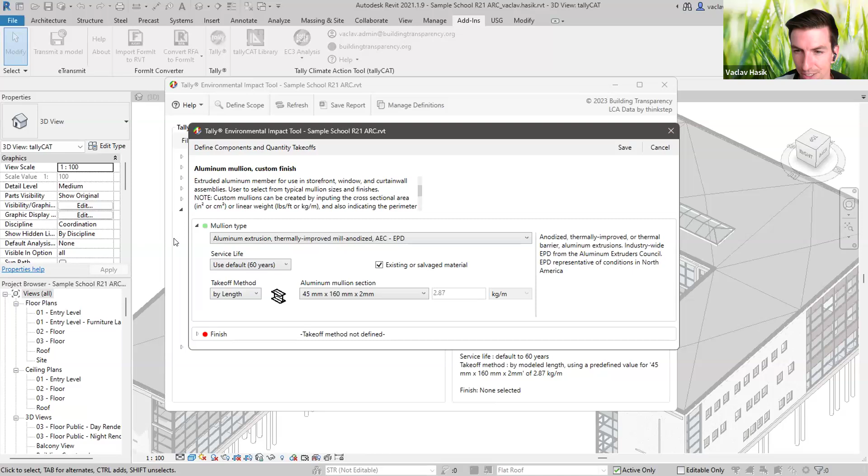So simultaneously, it depends. It just follows the regular structure of how you would be working on a model in Revit in general. It's been a while since I worked through the details of this, but if you are working on a workshared model, each person can check out a particular workset at any given time. And so you might not be able to work on the same workset simultaneously, but you could be working on the same model if you're working on separate worksets and you have those checked out separately.

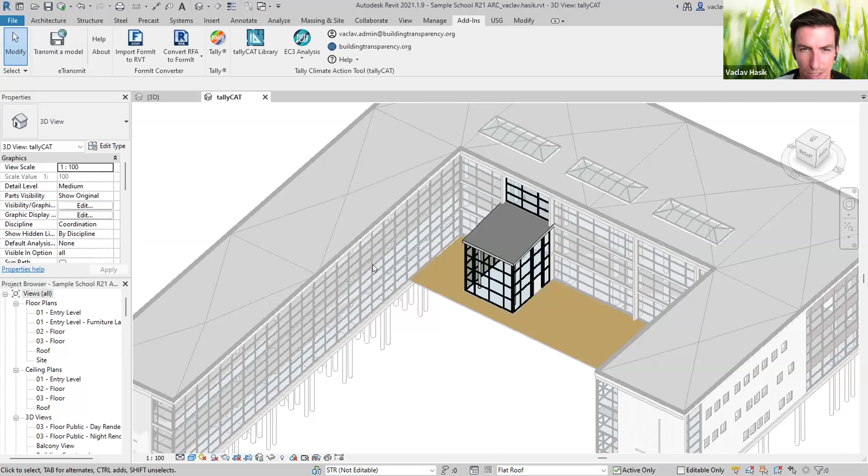The main thing is that anytime you make material assignments inside of Tally, you always want to save and synchronize back to the central model that you started from at the beginning, because that's the only way that you actually preserve the assigned material information data over time, and so that other people can later load the work that you've done yourself. All of the TallyLCA data is being written back into the model in extensible storage, and that's why you need to save and sync to the central model in order to preserve that work.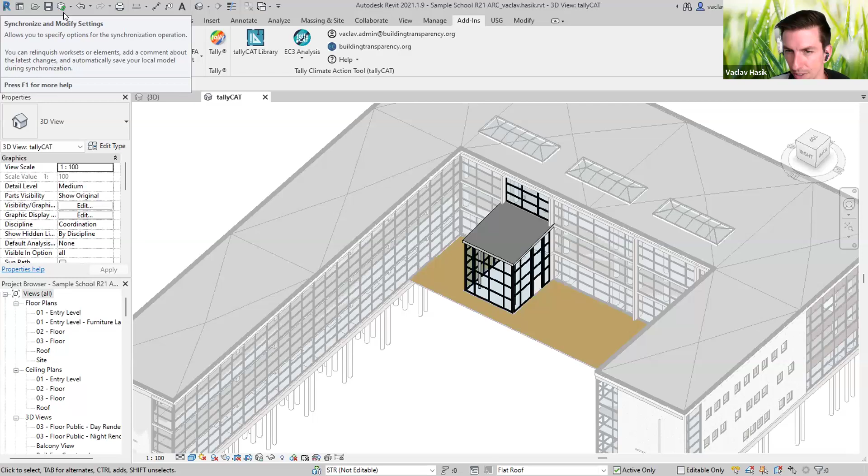Great. I think that's it for the Tally questions for now. If you think of any later on, we should have some time at the end, but we're right on time. Thank you, Vaclav.

Okay, I'm going to share a few slides and then we'll get into the demo of EC3. So what is EC3? EC3 stands for Embodied Carbon in Construction Calculator. It is an open access digitized database of environmental product declarations and an associated building project planner that will support you with estimating the embodied carbon emissions, again, from those A1 to A5 life cycle stages of individual building projects. We do have an infrastructure planner that we're currently testing, and we're hoping to expand the use of EC3 to infrastructure projects as well.

So the basic formula for calculating embodied carbon, and what's essentially going on in the back end of EC3, is multiplying a material quantity by the GWP or carbon factor of an individual material. I'll show you that when we go over into the demo of the tool, but that's the basic math that's happening in the background. At a portfolio level, we do work, like I said earlier, with a lot of owners and developers, and there are some features that they have access to where they can generate roll-up reports and do some data analytics at a portfolio level.

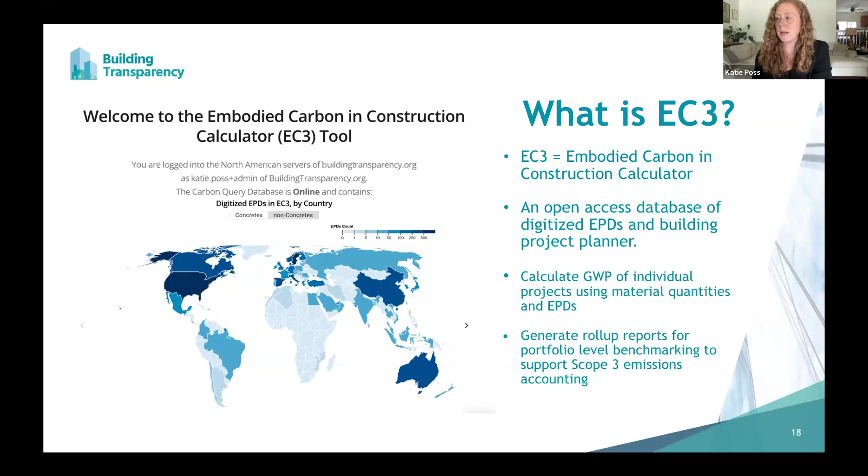Just to give you a glimpse of the data that we have, I think these numbers have likely changed since I took this screenshot on July 8th, but at that time we had just over 150,000 valid EPDs digitized in the database. These are coming from 2,400 different companies or manufacturers. They're the ones who essentially disclose or publish these EPDs, coming from 5,000 different manufacturing plants. And we have built out 227 material categories in EC3.

The heat map here shows you visually where this EPD data is coming from. EC3 started in North America, and as such, we have the most EPD data here, but we're starting to see that change globally. As you can see here, we're seeing EPD data being published in multiple countries around the world. And just to note that these locations represent the manufacturing location of the material. You can see here that the growth of EPDs has definitely trended upwards over time, and we anticipate that growth to continue, especially with some of the EPA grant announcements that came out recently, and I'll talk about that a little bit later as well.

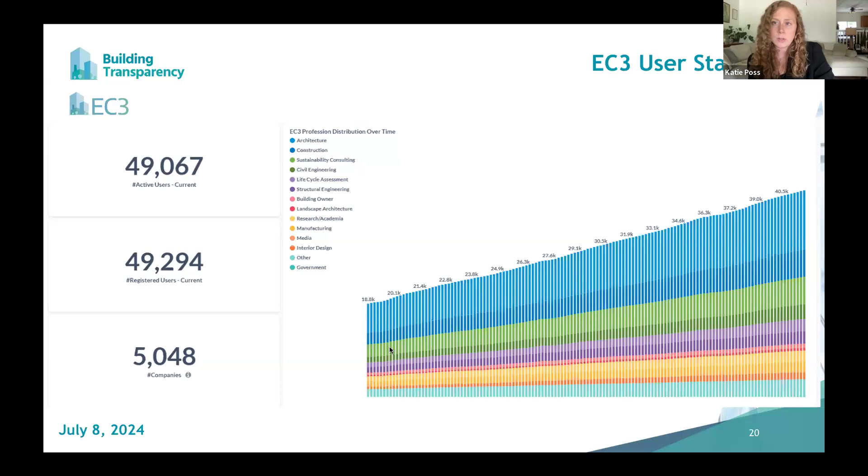Looking at our user base, as of July, I think we actually just reached our 50,000 user milestone recently. So we have over 50,000 active users of the tool, coming from 5,000 different companies, and a lot of architects. The architect profession represents our biggest user base, followed by construction, sustainability consultants, really the entire AEC industry, in addition to government and owners, who have utilized and are utilizing the tool in some way. Reminder again, A1 through A5 are the stages EC3 currently calculates, with B and C stages coming in the future.

Okay, I'm going to hop over. If you haven't done your homework yet and you would like to register for a free account to EC3, you can go to buildingtransparency.org and click this register free button. I am already logged in, and just a note that I am going to do the demo using my pilot account. The pilot was a paid subscription to EC3, and it comes with additional material categories, including those MEP categories that I mentioned before, and a few features that aren't available in the public free version. If you have the public free version, you'll likely see professional user next to your name when you've logged in.

So just a quick tour of the home screen. Here's that nice heat map again, but here you can toggle between concretes and non-concretes. And again, the higher EPD count is represented by a darker blue color. And you can scroll through here and zoom into the United States. This is how we see EPD data broken out by county here in the US, concretes, non-concretes.

If you're interested in EPD data in Europe, and then here's a bar chart. Ready mixed concrete definitely represents the highest count of EPDs that we have in the database by far. This is likely due to a number of reasons. One, the nature of ready mixed concrete, because it is so regional.

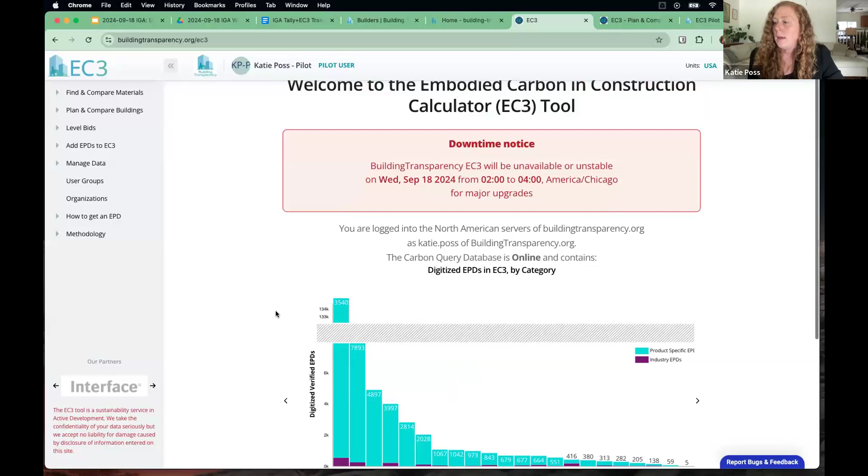Okay, let's take a look. If you are just interested in seeing if a product has an EPD, or if we have an EPD in our database for a specific product or in a specific category, you would go to Find and Compare Materials. And here you will see the parent categories. The ones noted as pilot are the ones that are available to the paid pilot partner tier.

As you can see here, MEP. And if you expand any of these little plus signs, you can see the subcategories underneath each parent category. So as you can see, we've built out a number of mechanical, electrical, and plumbing categories. So let's just say, I haven't tested this out beforehand, but let's see if we have any data

or EPDs for mechanical ducts. I'm going to then click the red EPDs button, and there are going to be a number of performance specification filters that appear that are specific to the material category you're searching in. I'm just going to keep my search terms very broad and then click search and click yes and see if we have any EPDs for mechanical ducts.

As expected, we don't have many. We have one here. This EPD is published by Veltec as the manufacturer. You can see here there's a description of the product, and here is the GWP. If I click this open button, this opens the digitized EPD entry in EC3.

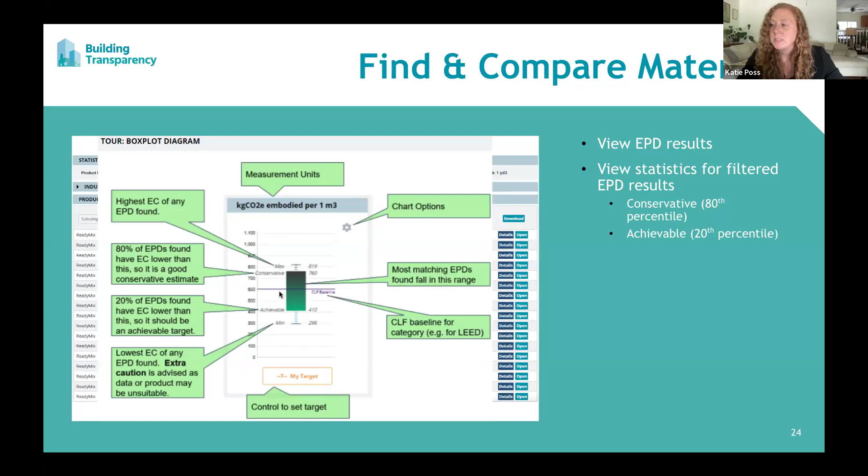Now, I want to explain how we come up with these statistics. We don't just evaluate the product-specific EPDs and include them in the statistics for the box plot and whisker chart. We also include the impacts of the relevant industry-wide EPDs, and we weight them more heavily than a single product-specific EPD. We do have publicly available methodology on how we determine these statistics. So if you're interested in diving deeper there, we can provide a link to that.

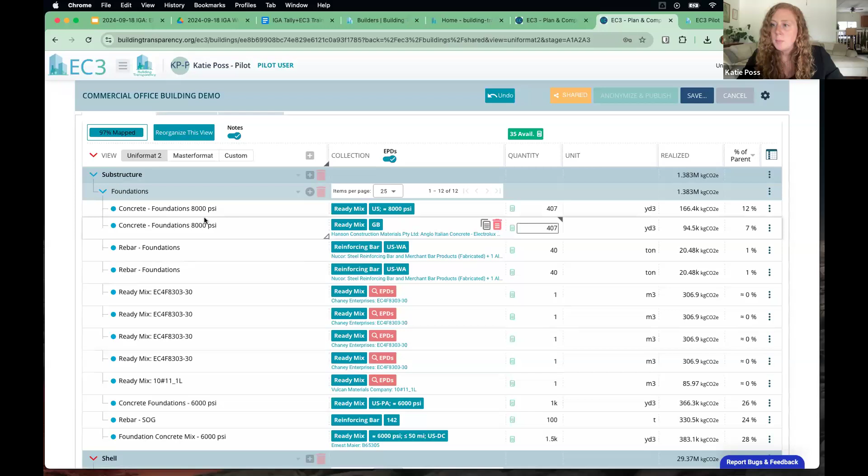Okay, I'm going to jump back over to the live demo. So in this example, you'll just continue that process for adding every material that you want to include in your analysis. Again, remember, you can use this button to add a new element. You can also add a new subassembly like this. Let's say you have some basement construction materials you want to model. And as you can see here, I have a pretty extensive model filled out.

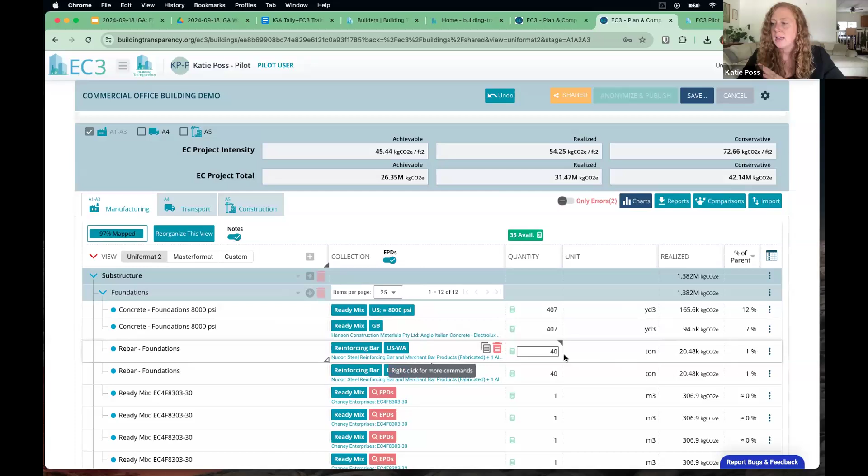So if I just simply click use this collection, you'll know that I haven't selected an EPD because there's no manufacturer and description below the collection. So this is, again, defaulting to the conservative value in the absence of an EPD. As you enter quantities and as you assign collections, the embodied carbon totals are going to roll up and sum up here.

And we show you the results as a range. We're not showing them to you as a single deterministic number or value. We're showing you the achievable, what we think you can get this project's embodied carbon down to based on the 20th percentile of available EPDs. The conservative value is that, again, that 80th percentile value. And then your realized value is based on the actual EPDs that you select where you have them.

So we have the totals here, and we also have the intensities and communicate that in kilograms of carbon dioxide equivalent per square foot. If you're working on a project outside of the US, you can toggle to metric if you wish. You can toggle back to US units.

Make sure you save your work. There is no autosave feature in EC3. If you close out of your browser tab, you will lose your work. I would recommend saving your work if you've entered several materials and mapped collections and spent some time entering data. Just hit that save button every once in a while just to be safe.

This is where I wish I had that Jeopardy music.

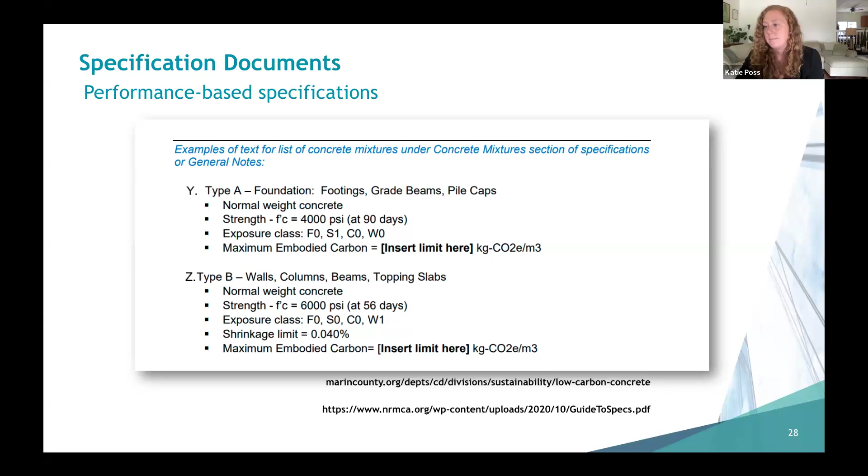Policy compliance filters. Let's see if my project has saved. We have implemented a number of policy compliance filters in EC3 to support those of you who might be working on a Buy Clean California project. We also have the CALGreen prescriptive pathway limits, FHWA and GSA IRA limits, and Buy Clean Colorado, which just went into effect in July. So let's pop over here. Great, our project is saved.

I'm going to see if I can show you what those policy compliance filters look like. So that will appear as a compliance dropdown. And as you can see, there are a number of options. In this case, I'm going to apply the filter for Buy Clean Colorado, greater than 8,000 PSI, lightweight, no, and then click search. And the search results are going to be the EPDs that fall at or below the GWP threshold and in compliance with Buy Clean Colorado.

One more thing I wanted to show you, if you want to share and collaborate on a building project, by default, this button here will be red and say private. Click on that, and then you can share this project with others. You can do that by searching for their name, and then click add. I think I've added all the Katie Posses I can here. Let's say I want to add Vaclav.

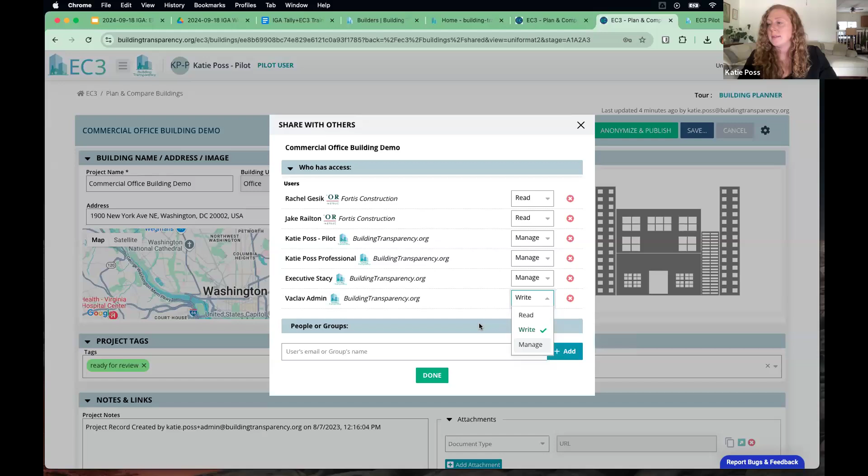In this case, write means that he can edit the document, but he cannot delete it. And manage means he can change the permissions that other users have. And in theory, I think he could also delete the project. Then click done. And now my project is shared with others. And again, that project, once you share it with them, will show up in their shared with me folder, not their my projects or my buildings folder.

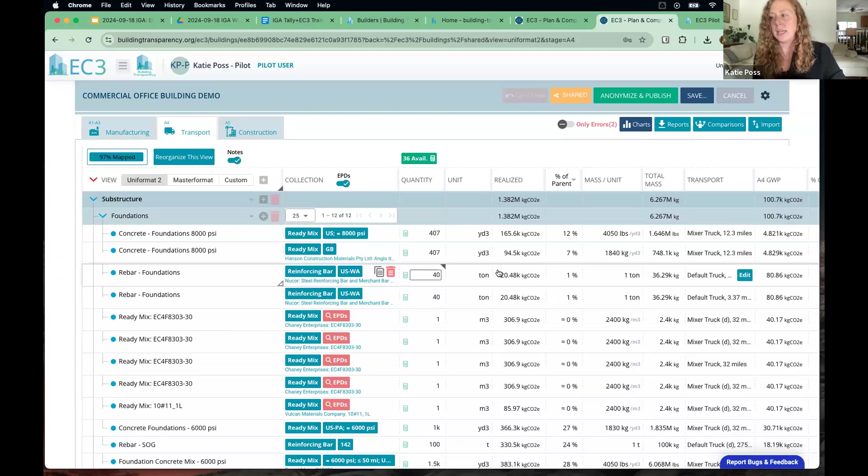If you toggle over to the A4 calculator, a lot of this work is done for you. Especially if you select an EPD, we know the manufacturing location from the EPD, and we know the location of your job site from the address that you've entered. So we do some of those calculations for you and conservatively estimate the A4 emissions impacts, which are shown here.

Under transport, though, you can go in and refine the mode of transport, which will have some impact on the calculations. In the case of ready-mix concrete, the default is mixer truck. 9.5 times out of 10, that's how it's going to get to your job site. But for things like steel or other materials that are shipped in different ways, if it's procured within the US, maybe it is getting there just from a truck on one leg.

But if it's coming from overseas, it could be coming by ocean freighter or ship first, and then by truck. So if you know that level of detail around how the materials are getting to the job site, you can specify the mode of transport and the distance of each leg here.

And then finally, under A5, this is where you could enter a description of the activities. In some cases, coming from a contractor background, we would collect this data on a monthly basis from each subcontractor. So I might say steel fab, October 2024, fuel or diesel. You actually don't need to say that because we're going to specify it here in the input type.

You then select the fuel or electricity that you're entering, and then select the quantity here. Let's say they use 50 gallons of diesel in the month of October. Okay.